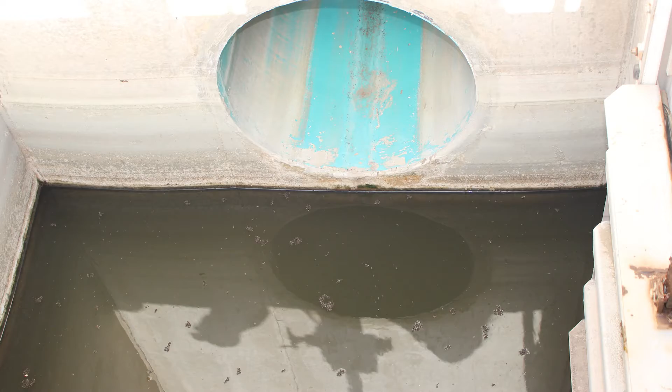Globally, Morocco has water issues. Moreover, the lack of functioning sanitation network and wastewater treatment system increases the scarcity of water resources. This issue has been studied by Agadir for many years.

To address this water issue, a suggestion was made. Wastewater could be used for agricultural lands and public garden irrigation. Thus, the sewage treatment plant of M'zar was created as a pilot project in 1992.

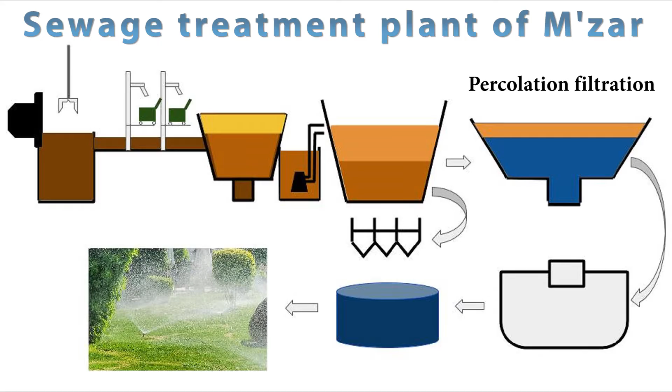The plant is located in a natural park, it extends over 200 hectares and it treats the sewage of Big Agadir. The main feature of this plant is that it uses the percolation filtration technique. This technique requires dry weather, a lot of sun and space, which is a good solution for this city.

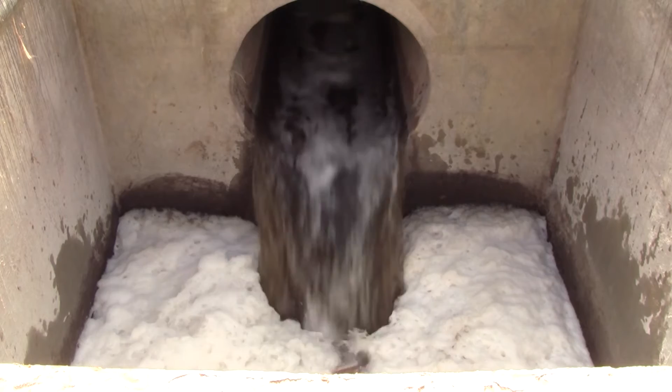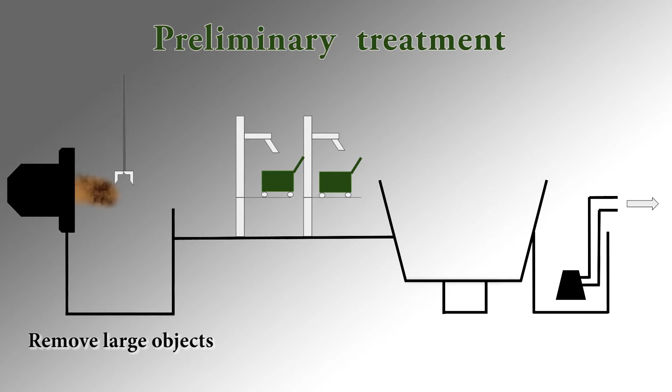First, Big Agadir's wastewater is collected, then it is transferred to a pump station. Afterwards, the preliminary treatment is performed. There are many stages. To begin with, loose sewage is cleared of big objects. Next, a grid removes more waste. Thereafter, sand and oil are extracted.

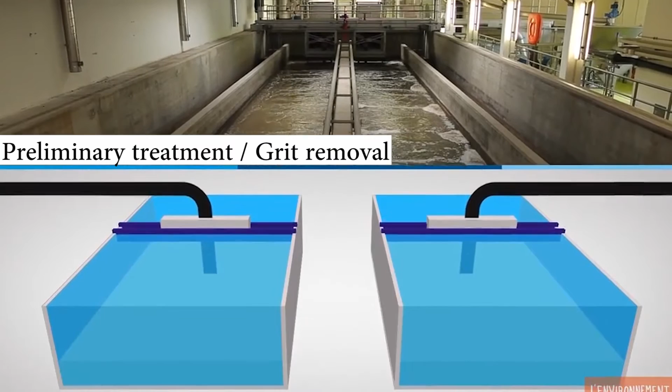On the one hand, the sand is decanted at the bottom of the tank and is sent to a landfill. On the other hand, the oil is removed thanks to the air, which goes up from the bottom to the top.

When the sewage gets to the treatment plant, it is left to settle in anaerobic tanks. They are 115 meters long by 35 meters wide. Through this process, grease and oil rise to the surface and are scraped off.

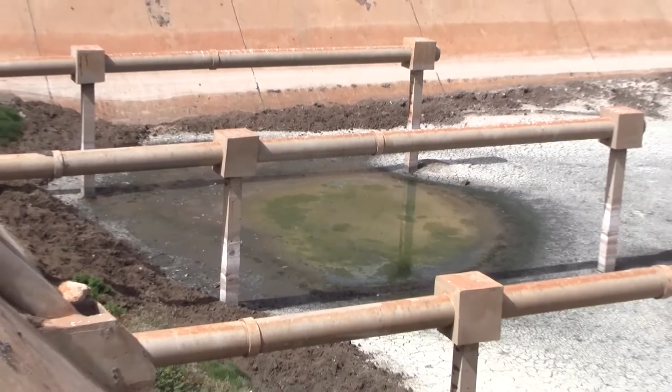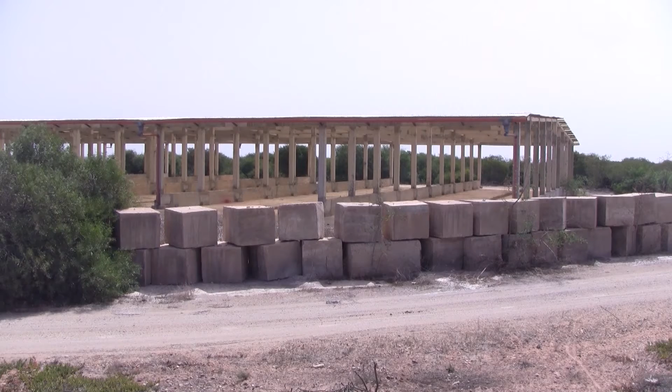However, the tanks are underexploited. Out of 13 tanks, only 9 are used over a period of 5 years. Afterwards, there is a rotation to clean unused pools and keep the plant operational. Then, the sludge is left to dry, but it's not upcycled. Researchers are working on how to compost it.

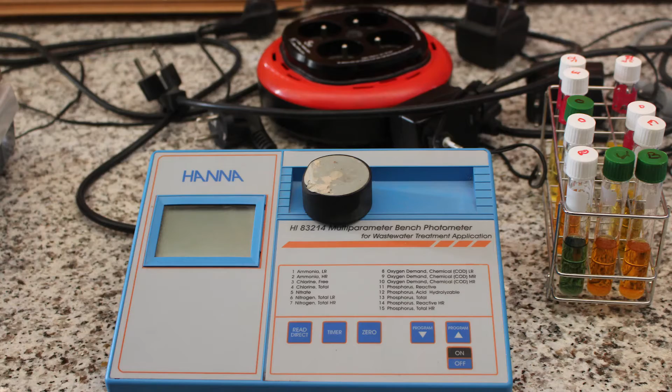In order to check if the water is safe, the laboratory controls different parameters like BOD, pH, and COD. Afterwards, a fifth of the water undergoes the secondary treatment and the other part is released into the ocean. The problem is that it results in biological contamination and nitrate pollution, which impacts leisure and fishing activities.

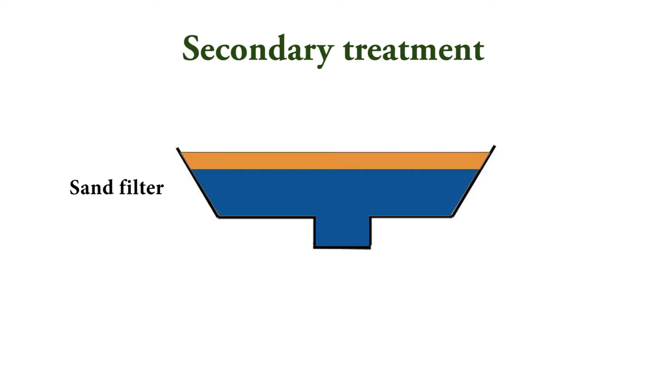The next step is secondary treatment. The wastewater passes through slow sand filters to be cleared. This process removes turbidity and pathogenic organisms through various biological, physical, and chemical processes.

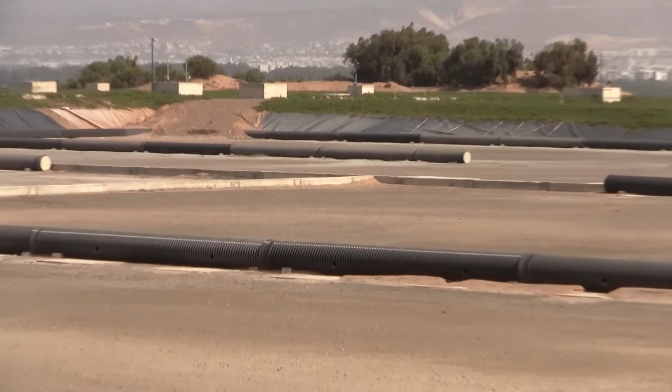Contaminated freshwater flows through a layer of sand where it's physically filtered and biologically treated. Thereby, both sediments and pathogens are removed. The top layer of the sand becomes biologically rich in organic matter and allows microorganisms to settle.

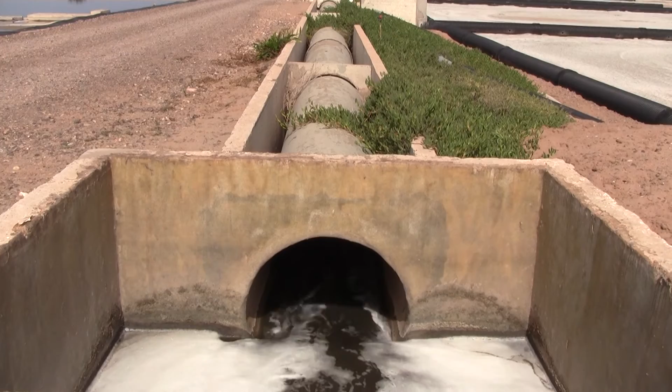To sum up, the sand traps the tiniest particles and releases limpid water in underground pipes. Each filter works 3 days in a row, then the surface is cleaned to avoid sludge saturation.

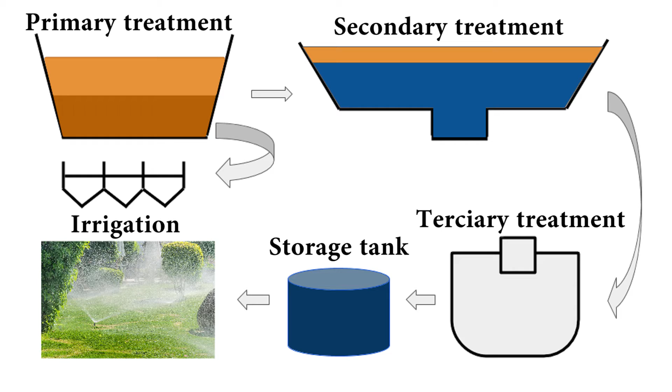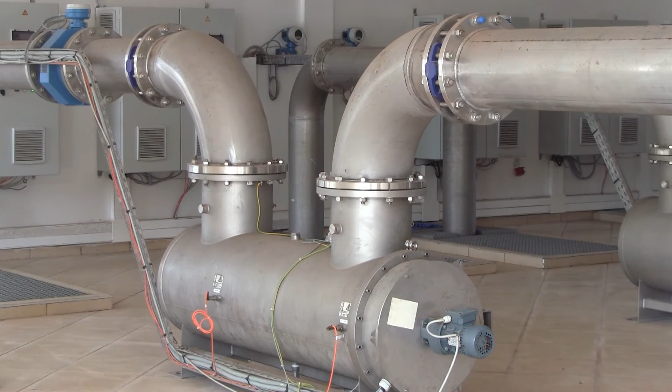Finally, wastewater is disinfected. This treatment is needed to substantially reduce the number of microorganisms in the water. Ultraviolet treatment is used in this plant, which means no chemicals are used. Compared to other methods, the treated water has no adverse effect on the organisms that later consume it.

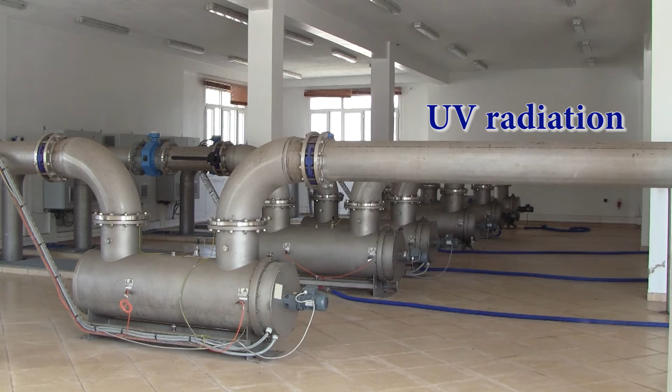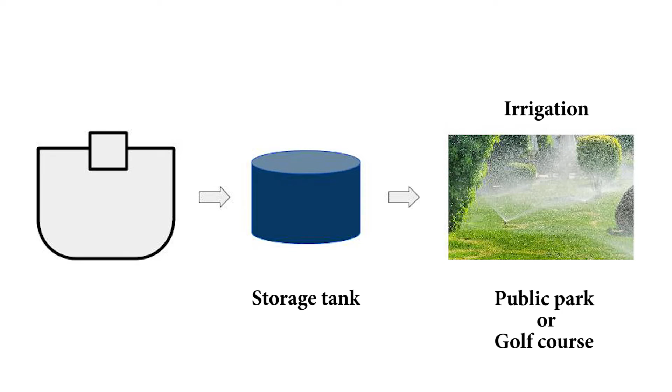Indeed, UV radiation impacts the genetic structure of microorganisms. As a result, many explode and the remaining ones are unable to reproduce. Once the water is cleared of microorganisms, it's used for public park or golf course irrigation.

To conclude, the wastewater treated by this plant can be reused. Consequently, it decreases the amount of fresh water needed for irrigation. However, as we have seen, this plant needs a lot of maintenance.

For example, all the wastewater could be treated by improving its capacity and its management. The sand filter operating space could be increased. In addition, the plant produces a large amount of sludge, but it isn't upcycled because of mentalities and legislation. That's why our company wants to help and perfect the plant by improving some parts of the process, like using more anaerobic tanks, for example.